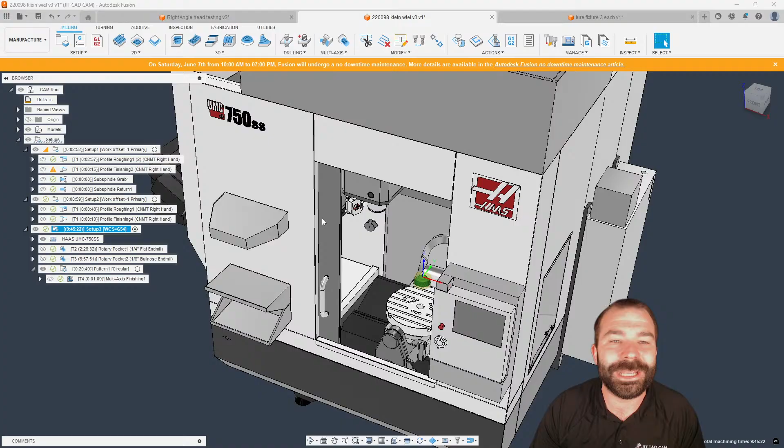When you simulate stuff inside of Fusion, if you guys didn't know this, I'm going to go ahead and simulate this. We could, of course, at the machine level, turn off the machine, turn on the machine. Now, this is where I currently am running a little different machine simulation.

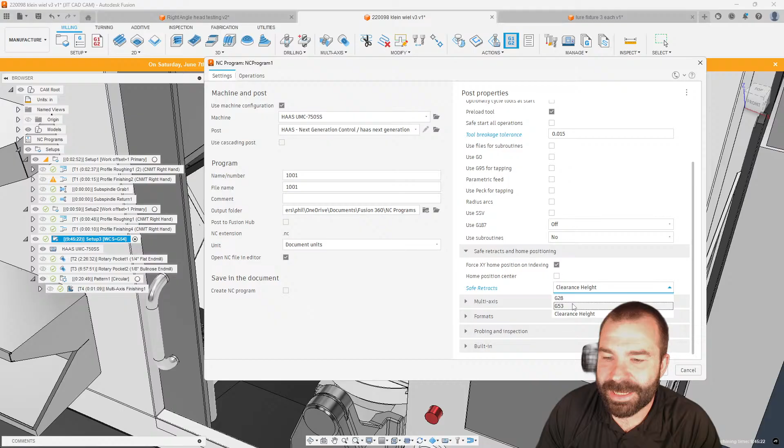Where is our safe retracts? We do not want clearance height. We always want to go G53 in this case. I got to go ahead and post out some code to lock that in.

And then with that being said, let's get back here. So let's do our machine sim this time around. Give her a sec to think.

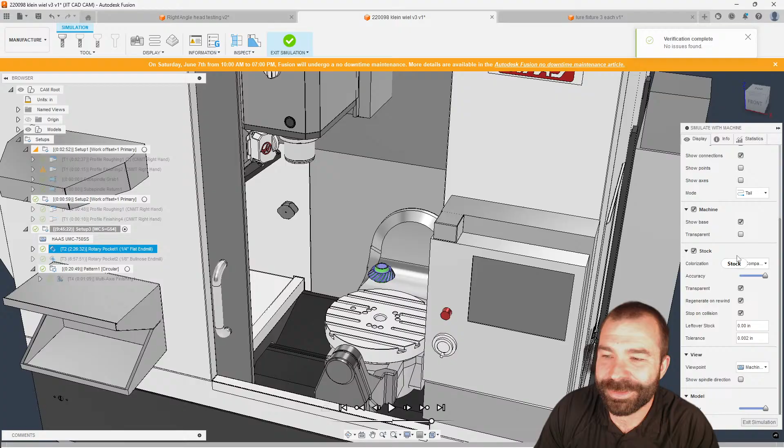So again, when you guys are doing the simulation, to me, it just bothers me that it's on by default. No offense to Autodesk, I know how you guys build this, I love it. But you can always turn off the machine base in simulation, right?

And as you guys can see, we could go through and now run our simulation and see our whole machine work through everything. But if you're like me and you're just like, why is it even on in the first place, right? Because I love being able to look at stuff all upside down and backwards.

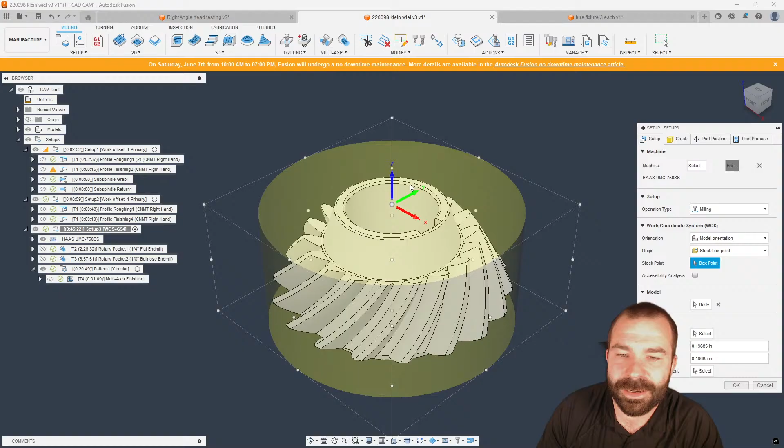So what I'm going to do is go in and we're going to edit our setup. We're going to edit our machine and give this a second to pull our machine up. And now what I'm going to do is go to model.

And what you're going to notice is you cannot machine edit while you're in the actual machine utilizing it against a setup. So this is the fun of popping out another window, switching back to manufacture, go into my machine library. And with that, we're going to go in - oh man, we got to remember where I just stuck that one.

Technically, it's not going to matter, we could pull whatever machine we need to. Do we have it in here somewhere? I know I just downloaded it, right?

So let's go in, we're going to say edit machine builder. And there was nothing more than a right click there. Now, as you can see, if we are editing machine definition, now all you really need to do is make sure that you turn off the proper items, right?

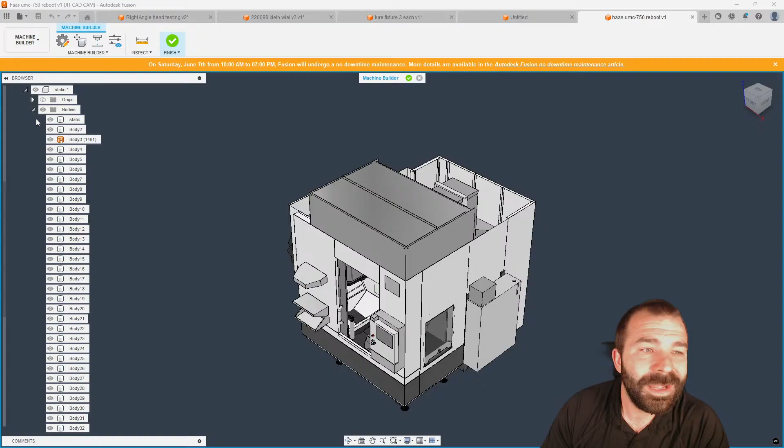So again, if you go into this list - not a great thing that these are all bodies for those of you that know me - but if I was to just turn off the static items, this is what Autodesk is referring to as the base. So again, when we look at the setup, the machine model, you have what's called the static item. This is what it's considering as the machine base, and that's what we're toggling off later.

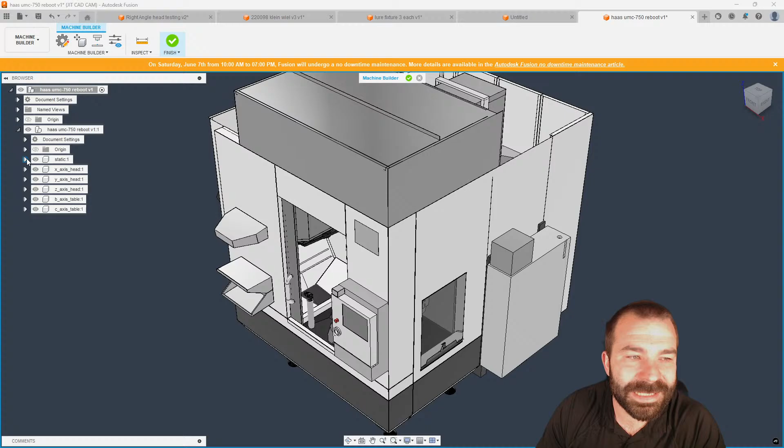Now, you may want to up the ante and make it way cooler, which would mean I only really want the casting, right? So again, as I'm clicking on the casting so that it will narrow me down to show me that, hey, there's the casting under the machine. Now, if that's the case, body 12 - I can actually edit and go ahead and choose only body 12, right? So again, the problem with this entire model right now is because it's not components.

Now, I am going to say this one is one that we've messed with a lot, and it's an older machine sim. But because that stuff was never components, you can't pick and choose, which is why we built videos on how to organize these things best to your ability.

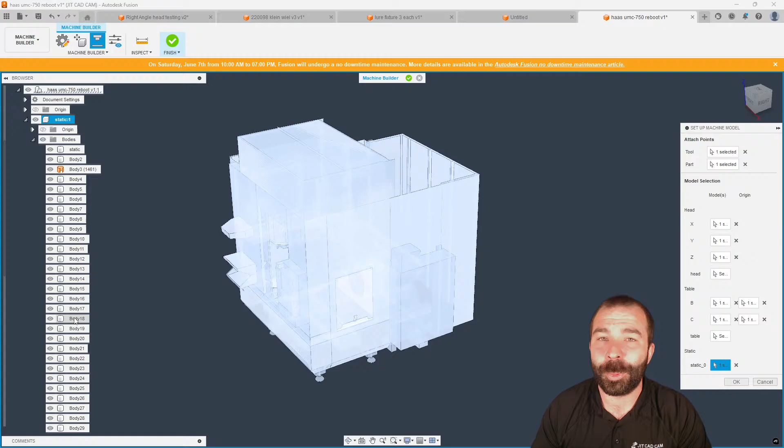But again, the idea is let's just turn it off visually here. When we edit our machine in machine builder, we're going to hit finish. And then with that being said, we could go back to those fishing lures - or in this case, that is our gear that we're working on.

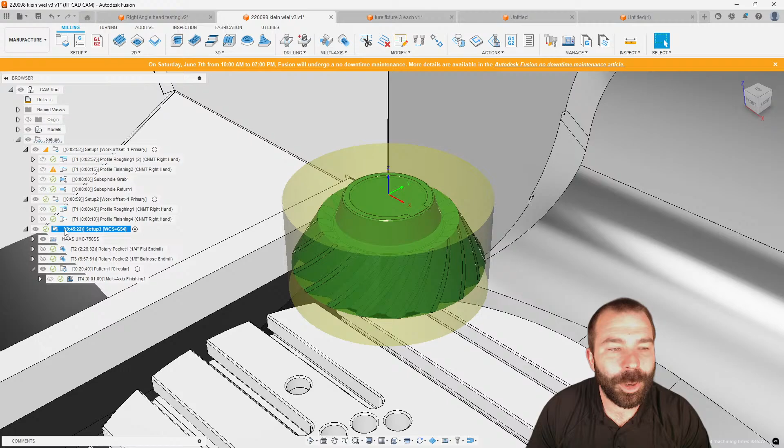So remember, this is the Haas UMC-750SS. So again, we go back, we swap out that machine. We're gonna go into our Haas folder. There it is - you could see it's already turned off in the displayed image.

And this is just me, guys - maybe you guys think like me, maybe you're like me. I don't have the enclosure in the way anymore, I don't have to worry about it. And just like that, I can actually see a lot better around my machine.